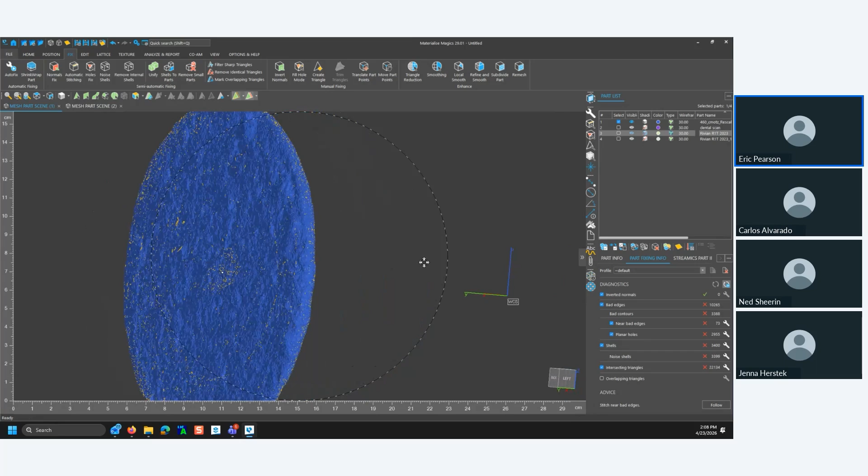But if I turn on my bad edges, we can see that there are a lot of spaces around this disc that are not quite touching, right? We've got a lot of holes in here, a lot of really small things that we need to remedy. And if I go over to my part fixing info tool page down here, you can see we've got over 3,000 bad edges or bad contours, 73 specific ones that are almost touching, but not quite, that don't align. And then we've got almost 3,000 holes on this, right?

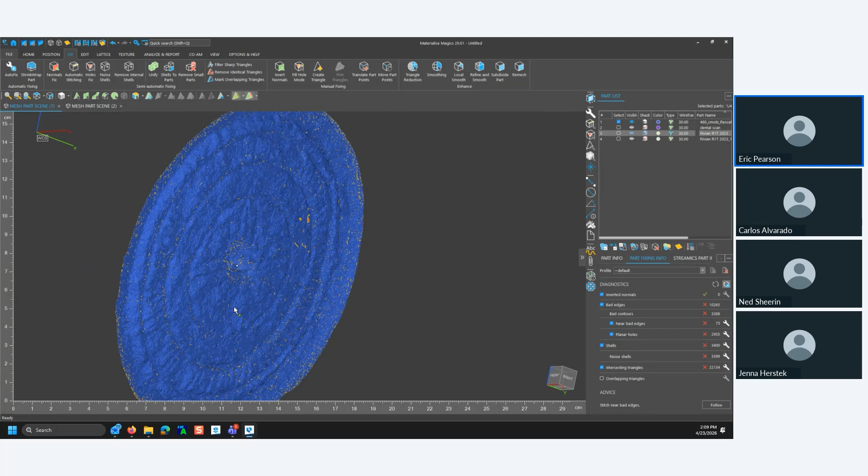This isn't something that I would expect anyone to go through and manually fix every last one of those holes on this STL. And then another issue with this part is that if you're going to be using this or printing this off, you probably want to try and capture the actual curves of the object, right? And this piece of scan data is really kind of chunky, kind of blocky looking when we look at this. So I'm going to zoom out. Let's take a top view here.

And first off, I'm going to just patch up some of these holes and near bad edges using the stitching tools. So that'll go through and kind of bring some of those edges back together so that they are properly touching. And then I'm going to patch up some of these holes. Depending on which technology we're using, near bad edges can cause toolpath issues. Same with holes, right? You don't want to have gaps in the part that you're working with.

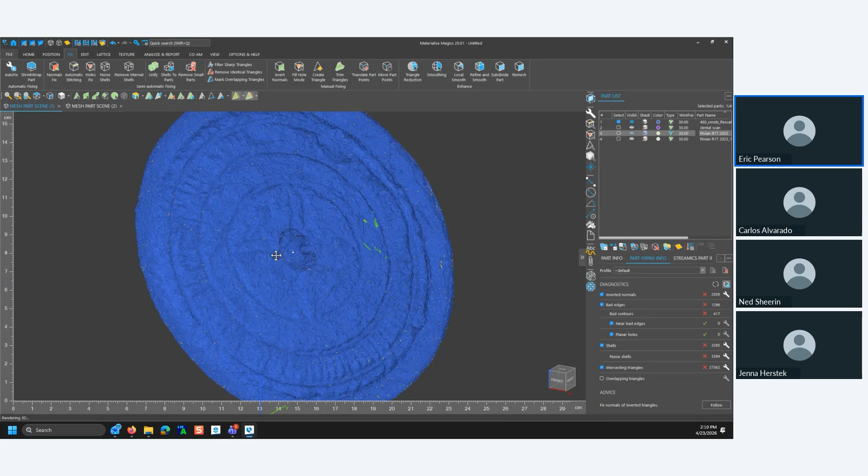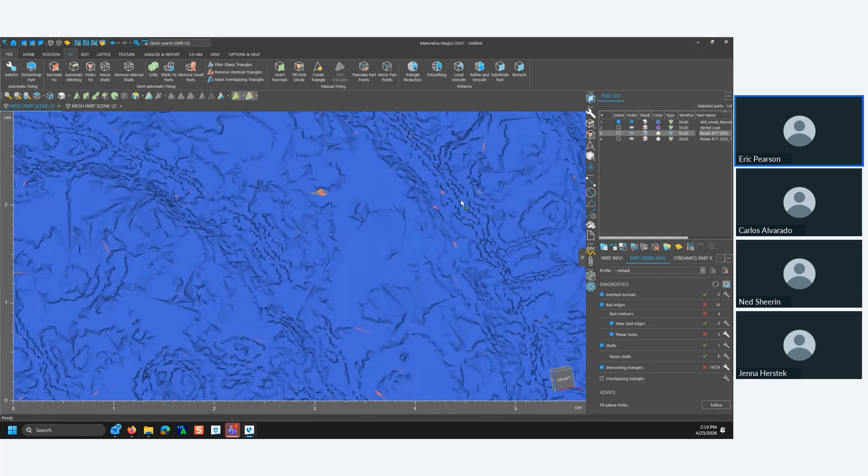Now we've got some issues that we continue to see with this part. But what I'm going to do here is use this noise shell fixing to clean up some of those pieces of floating geometry. So noise shells are like little bits of triangles from that scan data that have been floating in space, not connected to the full model, right? So now I have this. It's in pretty decent shape. I've got some geometry that's overlapping with itself.

But what I can do to try and help with that is use this smoothing operation. What the smoothing operation should do is average out the angle between all of these triangles that are used to make this STL up. And then that should get me back to a bit more of that organic geometry. It should help average out this kind of stair stepping we see on the edge of the disc, and it should help untangle some of these triangles from each other. So before I go through and fix any intersecting triangles, I'm going to try smoothing this out to see if that helps.

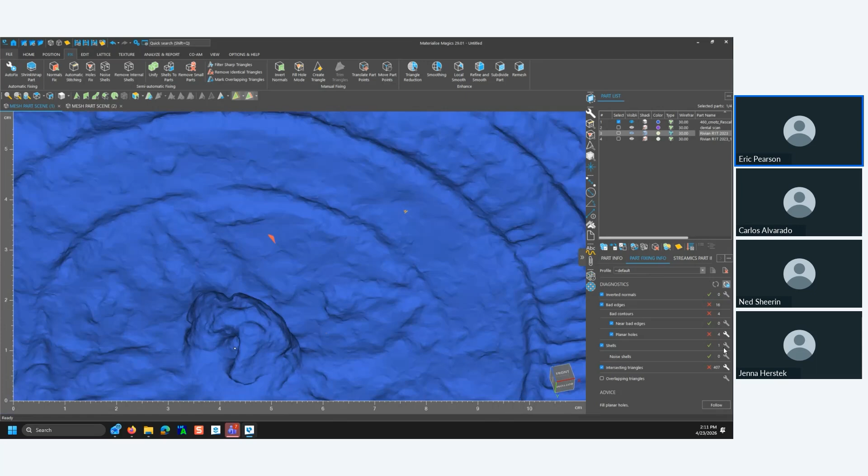All right. So now, I know I don't have a reference picture, but this does look a lot more like our disc that we have at the museum. And you may have noticed down here in the bottom, I went from several thousand intersecting triangles down to about 400, and maybe 4 more holes. So let's patch those holes up, deal with some of those shells, and then clean up my intersecting triangles.

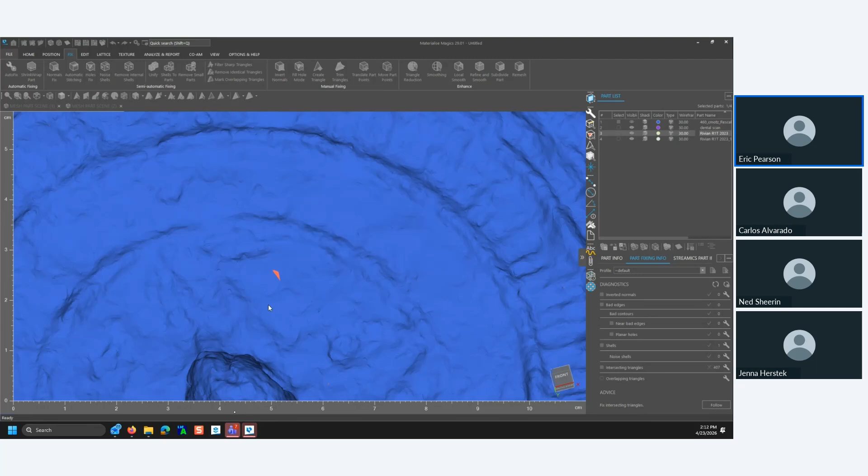And we have a solid part here. Normals are all good, so we shouldn't have any toolpath errors from the tool reversing on itself. Everything's connected. We have one solid shell here, so we shouldn't have anything that is loose and floating. And then I could move on, send this over to slice or set it up with supports, and send that slice stack over to the printer, right?

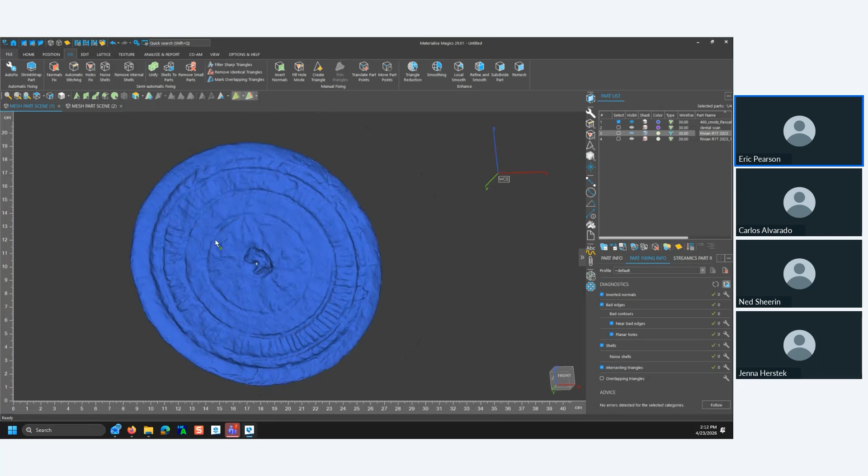Next one I want to talk about is another piece of scan data, right? This is a dental scan taken from a set of a lower jaw, right? Now, typically for a part like this, you'd want to have a base so that you could set it down on the table, right? But as you can see, there is no bottom or base. This part is just a singular surface.

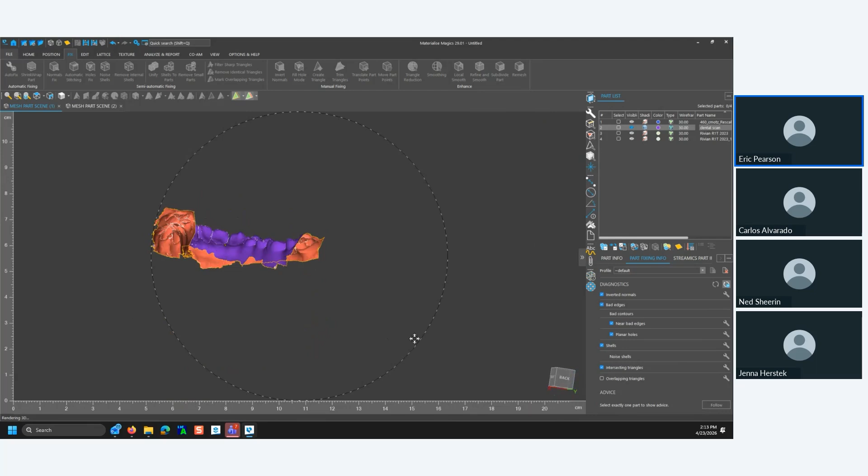So we have a function that we can use on this to make it solid, which is called surface to solid. And what I can do is I can just set it up as block based, give it a Z height of, let's say, 5 millimeters for now. I'm not going to hollow this out. So we're just going to drop it down 5 from the lowest point.

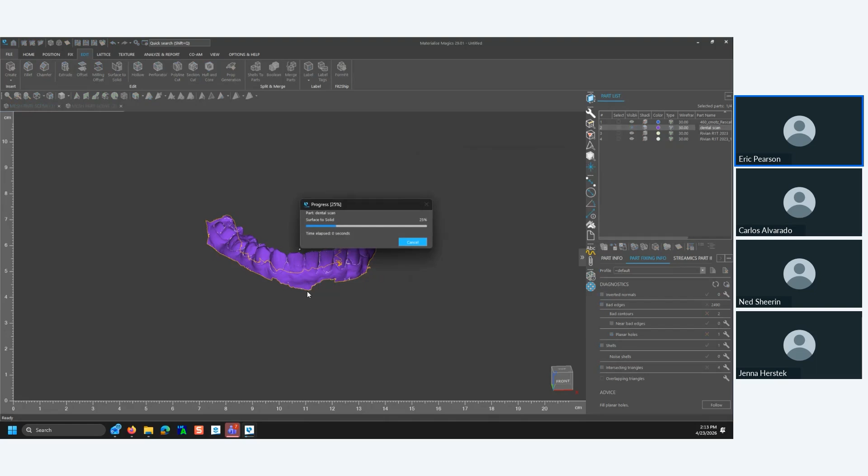But you'll notice that this is a little jagged, right? This isn't the neatest print that we could do, and we get a little bit of artifacting here as it tries to patch up the hole. So we can do better than this. So I'm going to just press Control-Z to undo, and then I can use a couple of the tools here in my editing suite as well as my fixing in order to get this to be cleaner.

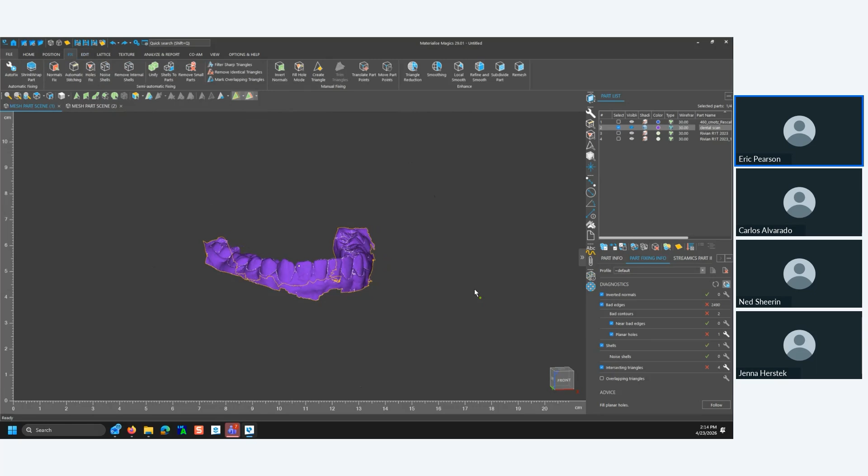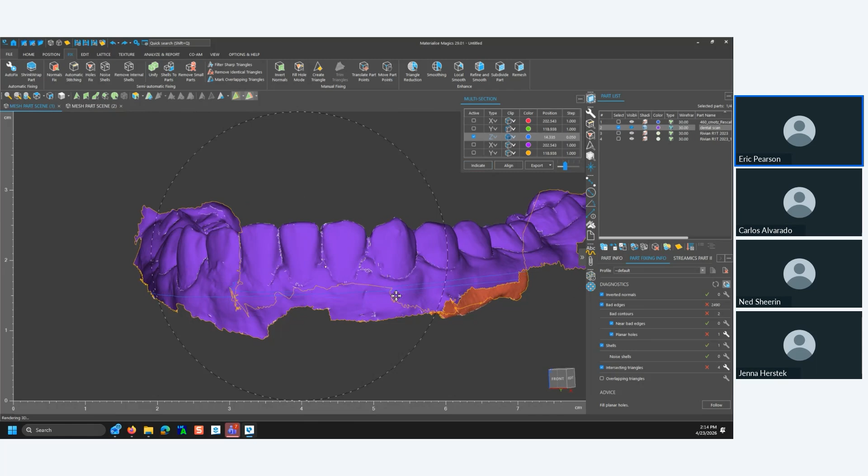First thing I'm going to do is I'm going to use my multi-section tool to set up a straight cut on this to get rid of a lot of this bad contour, right? So I'm going to lose a little bit of the gums here, but the important information on this part really isn't the gums, right? It's the teeth. So I'm going to set a cut probably a little bit below the tooth. I can use indicate to just click on my STL and set my line. I'm okay with it being right about there.

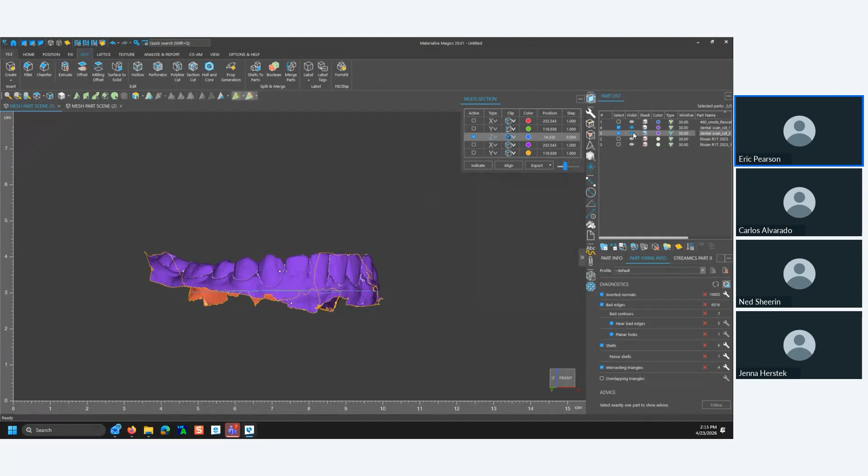And then if I go into edit, I can use my section cut tool. Just go through and cut this. It's going to give me a warning: hey, we got bad edges, this could cause issues. I'm okay with this. And now I have two parts. One is the area of the scan that I want to get rid of, and so I can just go through and unload that. And then I have the remainder of the scan that I can keep working with, right?

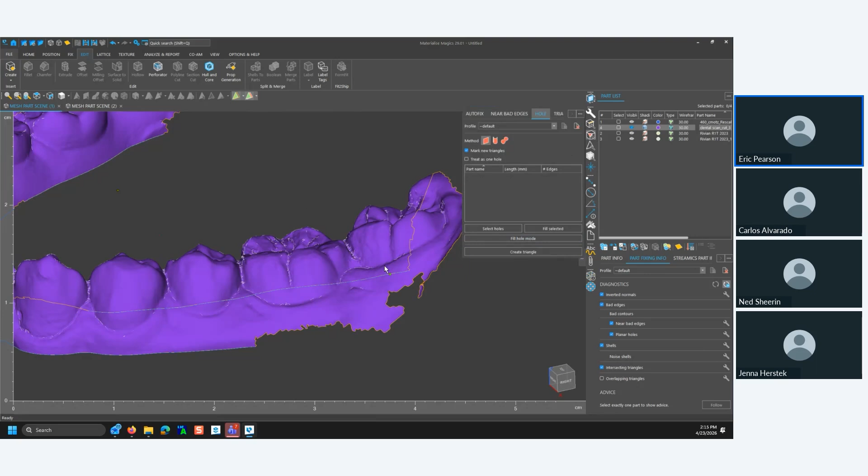So if I want to clean these edges up, I've got a couple of options, right? I can try to patch some of this up by using my hole fixing tools to create some triangles, like add boundaries here. So I can go here and then just add some information there. And then use my freeform hole filling tool to just fill that up. Smooth that over. I can do the same thing over here.

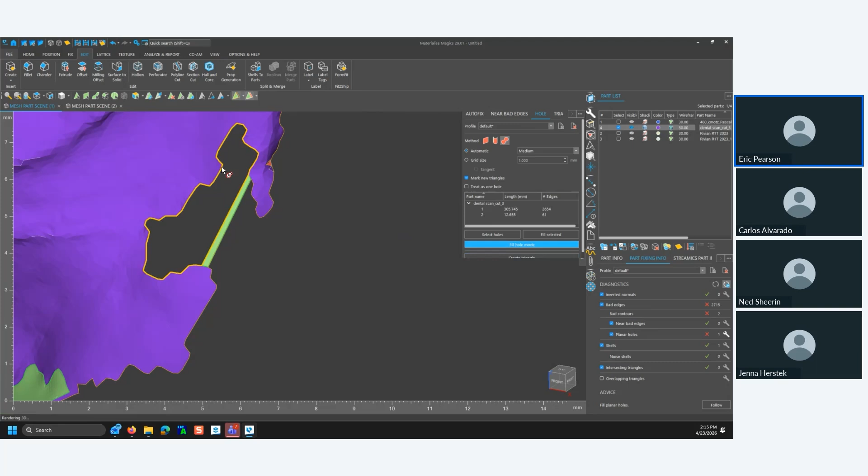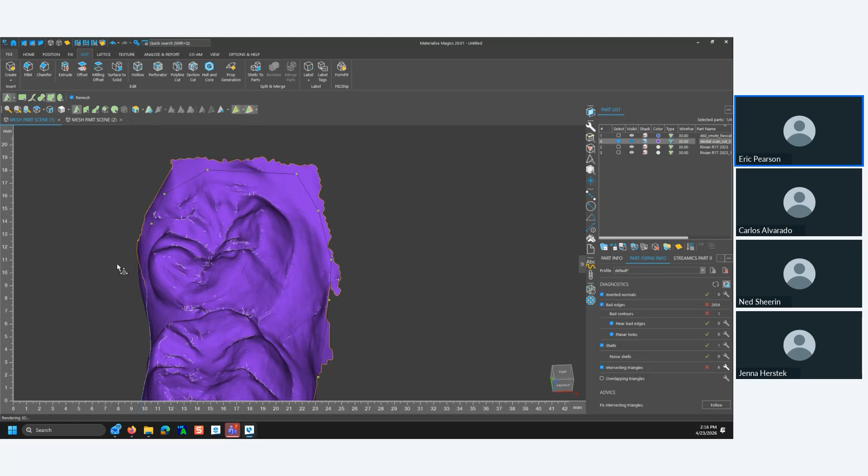And then for some of this area over here, right towards the back, I might want to just trim it. So what I can do is I can use my triangle marking tools in this ribbon, give it a polygon selection, tell it to remesh so that I'm able to cut exactly the triangles I want off. And then take a view from the top and just line this up so that I'm able to trim my STL. I got to close the polygon here. And that's going to mark all those triangles, and I can just delete those. And that cleans up my edge.

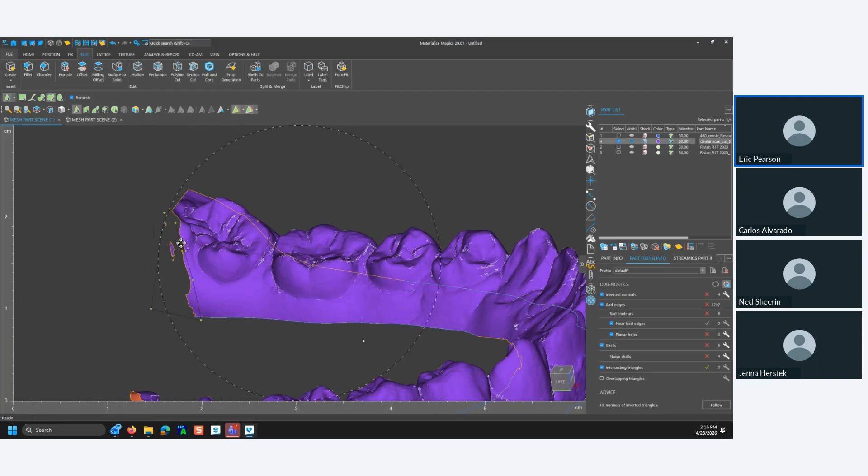I'm going to need to go back and take care of these polygons there, right? But I can continue this process of just cleaning this up, getting rid of information that we don't necessarily need in the final print. Delete that, and go through and clean this up, right? So I'm just going to go through and finish that process up here, where I just continue to remesh this part, clean that up.

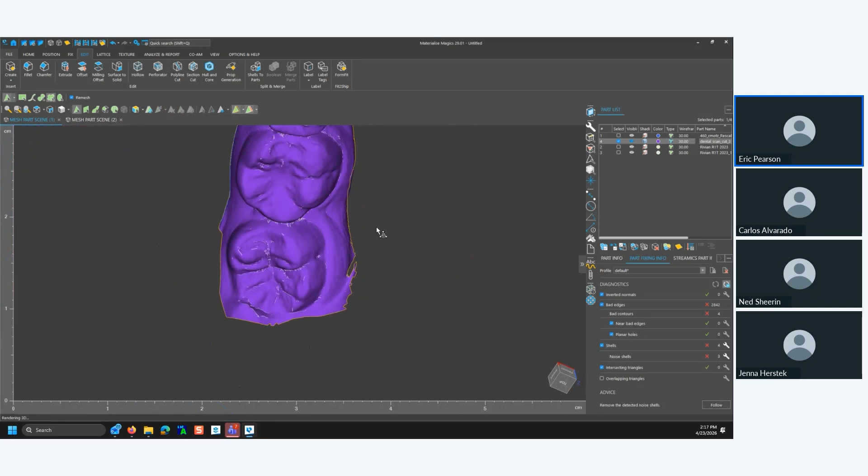If I were to try and print this part without giving it a base, if the slicer were even to parse it at all, say if I was making this in a stereolithography process, I would end up with possibly just a film, right? Best case scenario, I'd end up with a film floating in my resin bath. And that would be a mess to clean up. That wouldn't be a usable part.

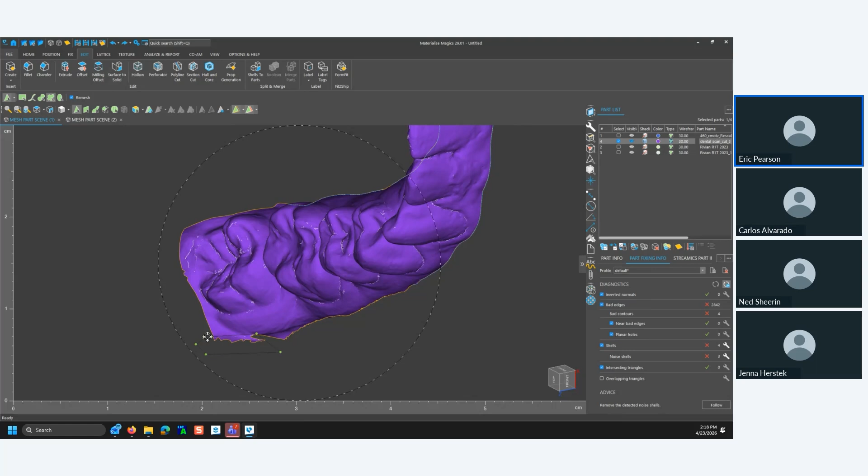It's probably similar with DLP, right? Or for metal, I would just end up with a very thin surface of metal here. Well, most likely the slicer would not be able to parse this part, or it would say, hey, there's not enough information to slice this.

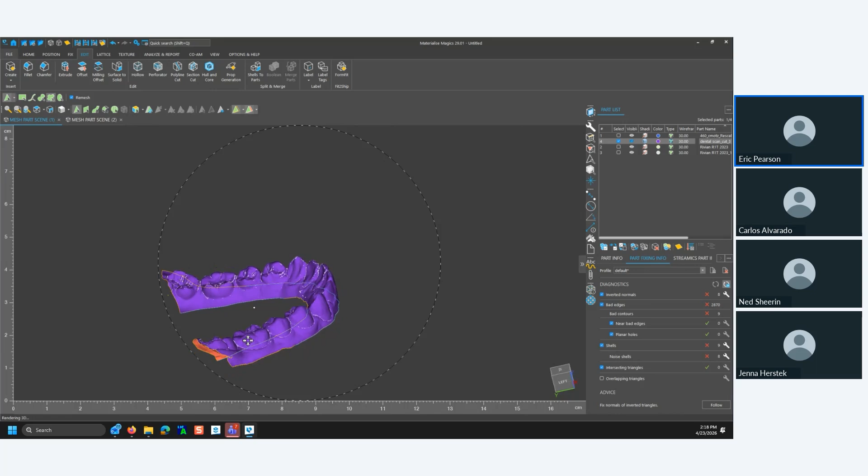So we've got this one surface that's still a little jagged, but I can go through and clean up my noise shells. That should get rid of my floating little islands of geometry. And then, in the interest of time, I'll just hop over into surface to solid, go over to block based, set a height, let's give it 7.

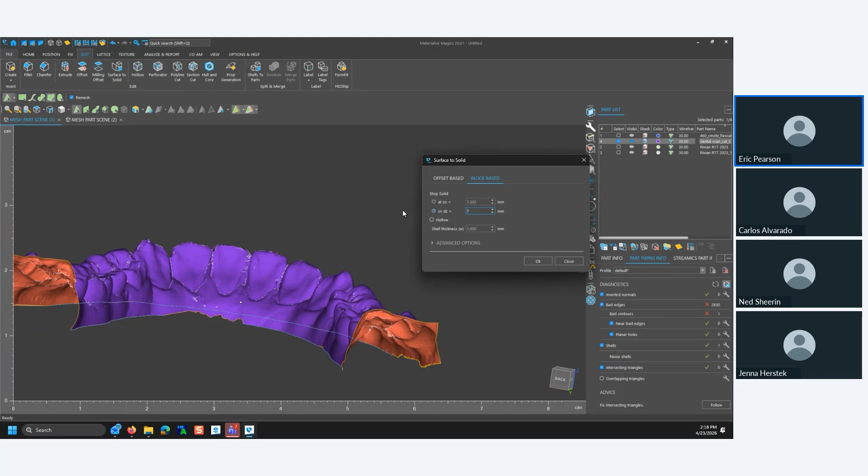And that will go through and create the base for us so that we can send this over to the printer. I'm not too worried about these intersecting triangles, but I can clean them up. Intersecting triangles can cause situations where you have overcure on a part that is printed in a stereolithography process.

So you might have discoloration, or in a situation like laser powder bed, you might end up with different mechanical properties there. In laser powder bed for plastic, you would probably end up with some discoloration in that region as well. Or something might even break because too much energy has been put into it.

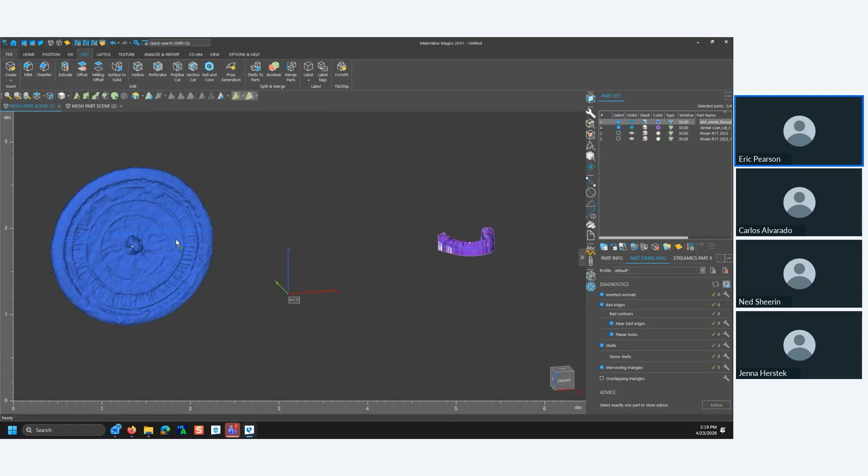Okay, so those are kind of the first 2 files. I was able to fix those pretty quickly. And the last one is this model that I have of a truck. So this is what it looks like when I import it. There's a lot wrong with this model here.

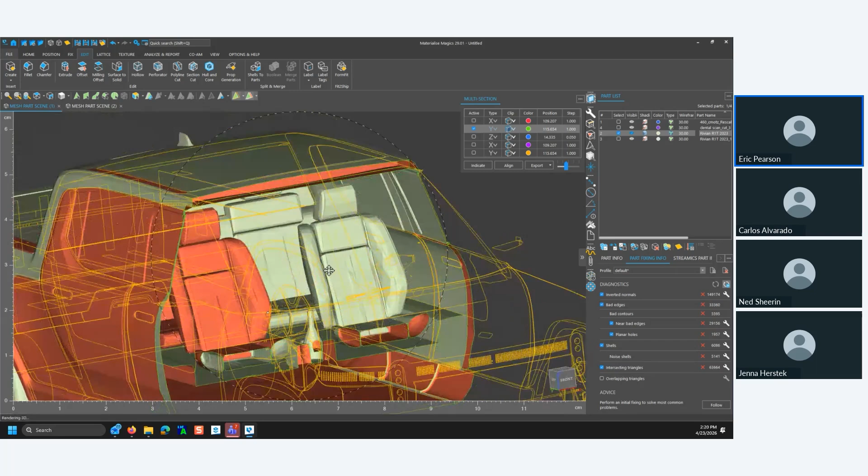Generally, the first step to any fixing I recommend is to visually inspect the model and get an idea of what's going on. So I can use some tools over here with my sectioning to take a quick cross section. I've got all of my seats on the inside, my steering column, the dashboard. I have a whole bunch of little holes for individual LEDs going on here.

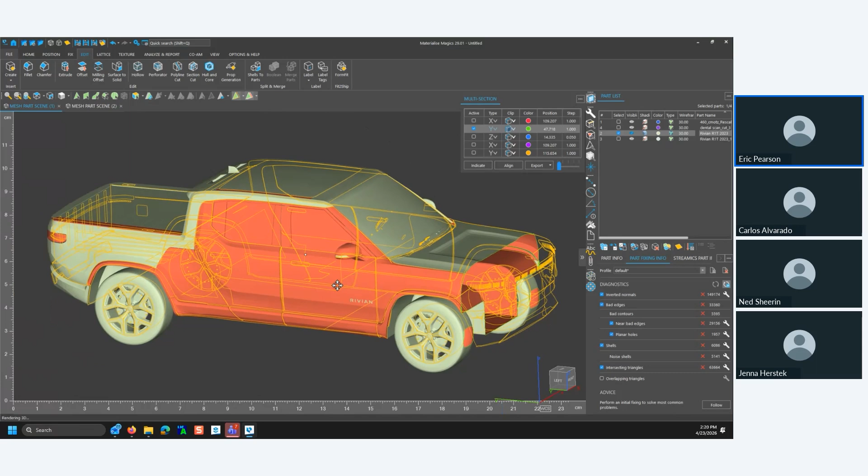I don't need all this information. When I print this, I just need the outer shell for this part. There's a lot of steps that I needed to go through to fix this. Generally, the place I would start is fixing these inverted normals. The inverted normals are marked by these surfaces that are in orange.

What this can cause in the slicing process is a confusion in your toolpath. For SLA processes, it might error out the slicer. For DLP processes where you need to have solid blocks of information, it might cause areas that are supposed to be closed to be open, and then you'll just be missing large pieces of geometry or have a hole in your part and then fail the print.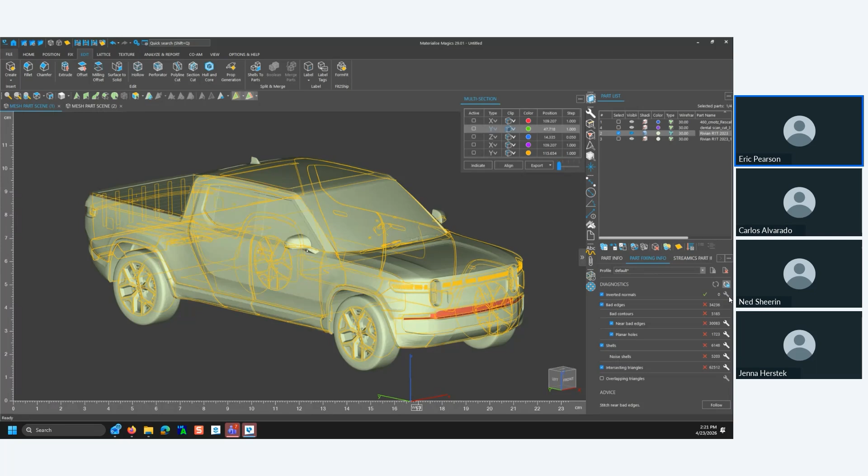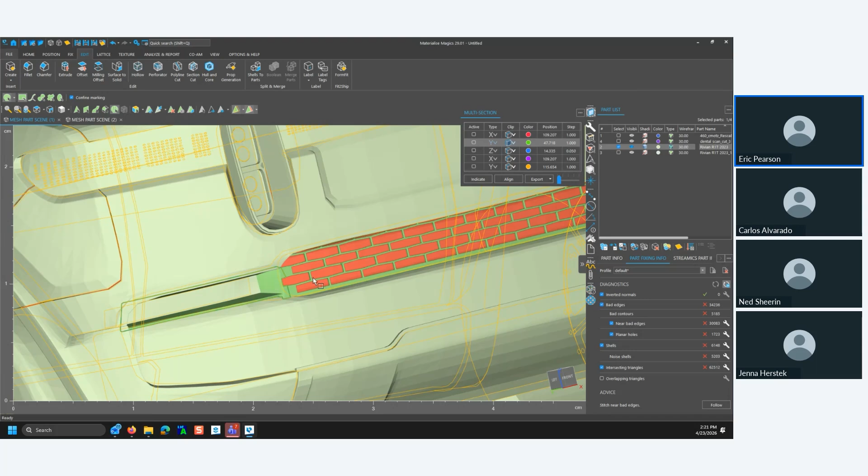So one of the things I would want to do here is fix these inverted normals first. That gets through most of my outer part here. You'll notice that the grill has been inverted back to be inside out. I can fix that myself. Oh, sorry, I need to use this tool. Just by marking this shell, grabbing that grill, and then manually telling it, hey, flip that back.

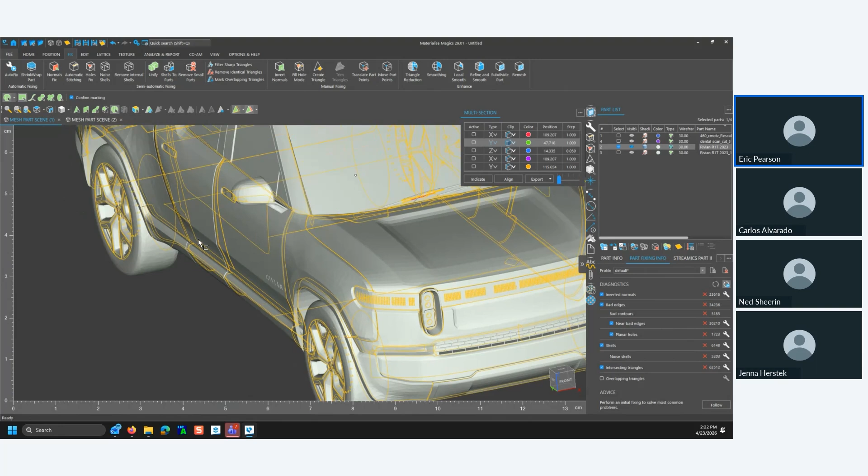I realize I'm using kind of a greenish color here. Let's make this a little bit more gray so that the marked triangles show up a bit better. So that's step 1. Step 2 would probably be going through and trying to close up a lot of these bad edges. If the triangles don't meet, then we might not have cohesive scan paths or tool paths for our slice files, which could cause failure at the print or at the slicer itself.

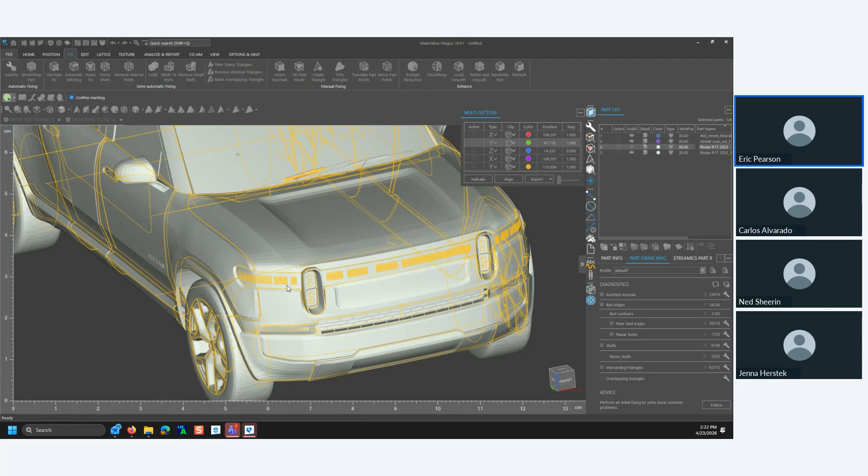So the next thing I would recommend: I know that all these inverted normals here are from the grill that I inverted myself, so I'm not worried about this number in the diagnostics page. But what I would want to do here is stitch this together and try to clean up a lot of those bad edges. You see that took care of a lot of the issues that I was seeing through these yellow lines.

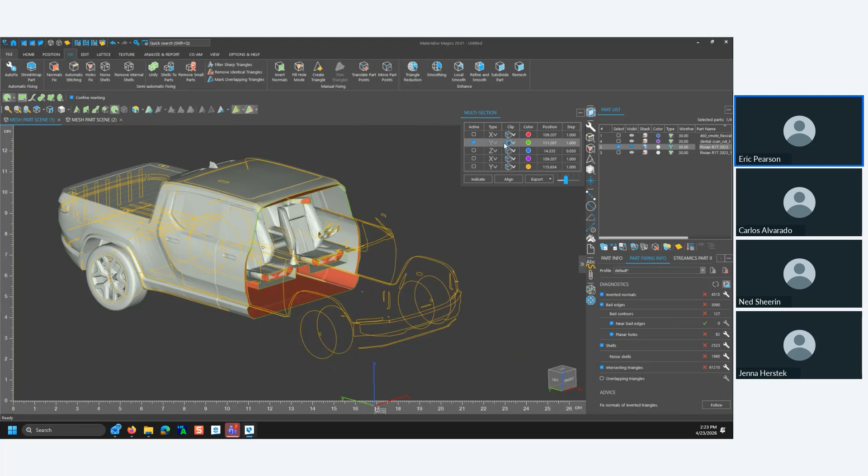From here, what I would probably want to do is go through and simplify the geometry. I don't need all the internals to this part. That's going to add material. That's going to add build time. These are things that we don't need to keep, unless we're planning on printing this in some kind of transparent material.

I can kind of declutter my view by turning on this hidden line function. And that will hide a lot of those yellow lines that we're seeing that are defining the rest of the vehicle.

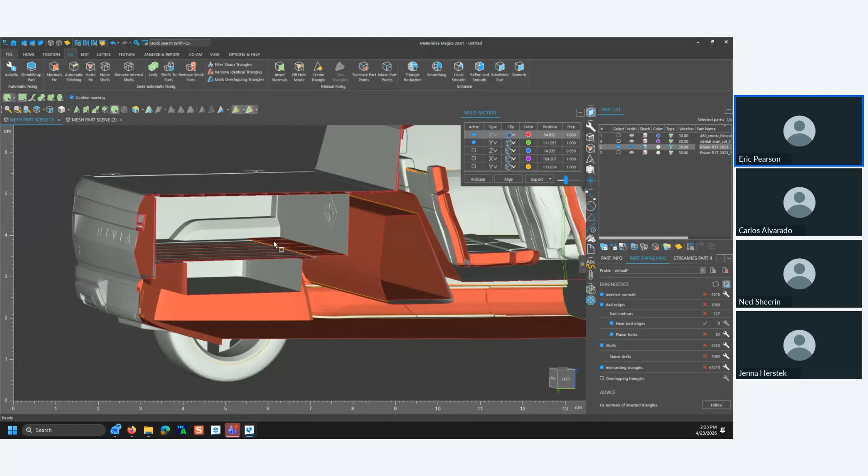While I'm trying to hide it, right? I don't need this interior to the trunk. I don't need all of these lights back here, right? Somebody went through and actually designed this very in detail, right? Or had a lot of detail on this when they were designing it, creating the STL file, but I don't need all of that to print it.

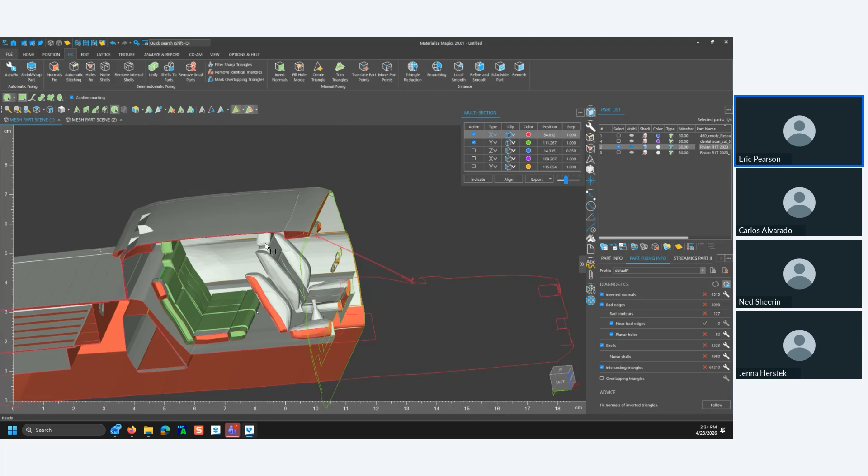So what I can also go through and do here is I can start manually selecting which shells I don't need, right? So this can be a little bit of a manual process sometimes, but it might be necessary in order to clean up the part. So I would go through, delete all these seats in here, get rid of the steering column.

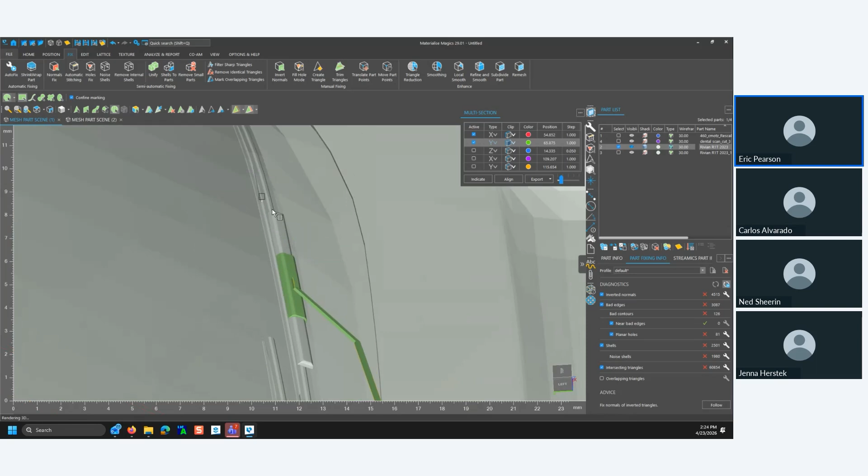Another thing to think about while you are going through this process is what detail can I capture and do I need it, right? So if you look out here, we have the windshield wipers. I might not need to have this detail. It might actually make it more difficult for me to work with this, right? So I can go through and get rid of the windshield wipers as part of this process.

Some other things to notice through the visual inspection here is that I don't have an axle connecting these wheels. So what I might need to do later is add a cylinder to make sure that these are connected to the part, or find some way to join these to the rest of the part. I might drill a hole in the finished product, right, and then run a rod through it.

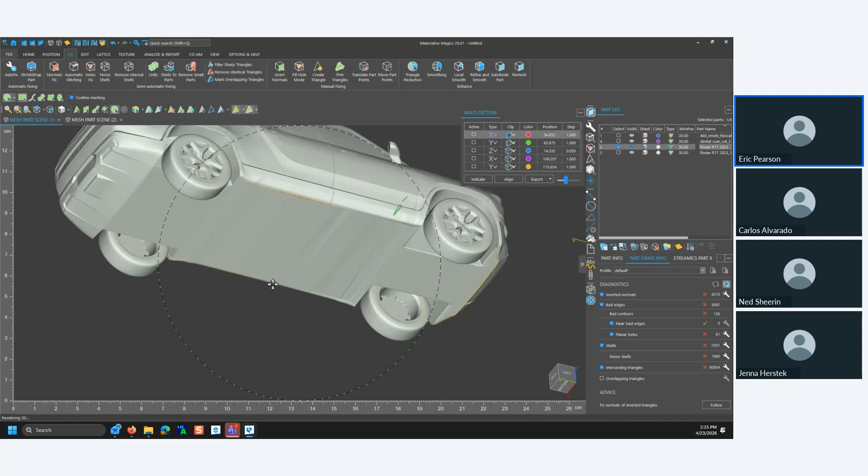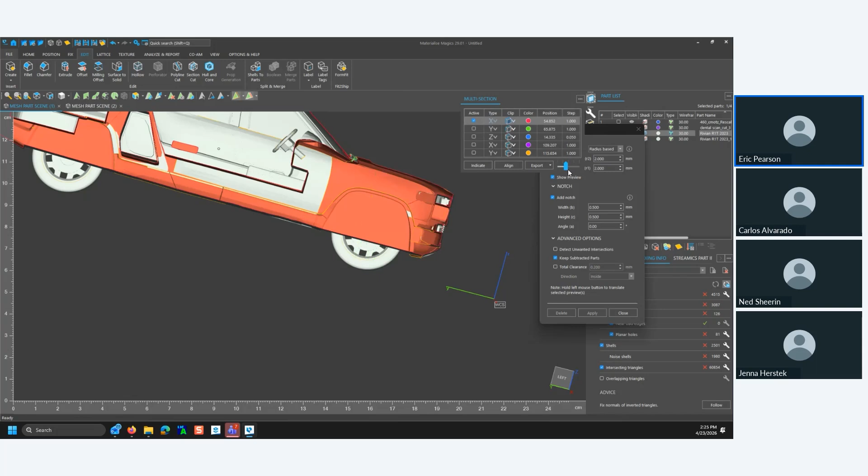If I wanted to do that, what I could do is just grab the editing tool, and we'll see if this works for me well, I can use the perforator, right? And I can set the radius of my rod. Let's say I've got a 2 millimeter diameter rod that I'm going to use, and then I can just X section. There we go. Hide the first wheel. Just line this up. There we go. Okay, looks like I need to fix this first.

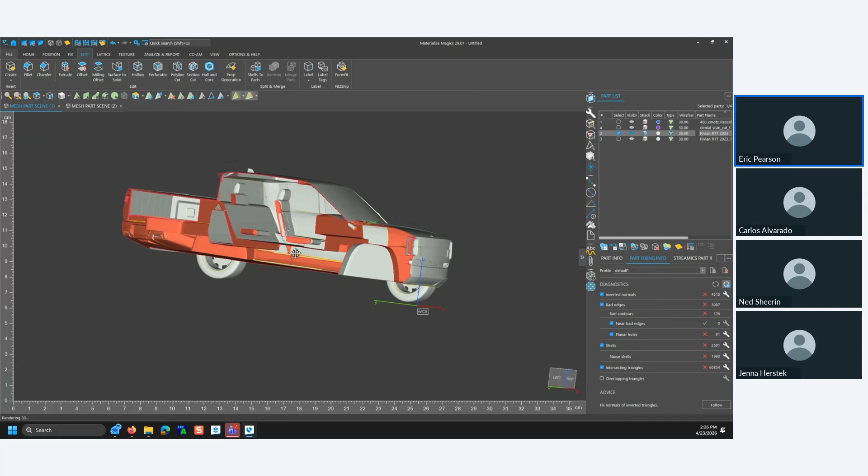That's fine. So there is a longer process where I go through and clean out, right, this entire truck. Once you kind of get the feel for it, it does become a little repetitive. So I have, through the magic of television, a version of this part that I've gone through and cleaned up a lot of things. You notice that we still have a lot of internal geometry here.

But what I'm going to do next is show you what is called the shrink wrapping tool, and it's going to look at this part and create a cohesive outer surface for me. And then it's going to take care of all of that internal geometry and toss it out because I don't need it. So I'm going to go over to shrink wrap.

I have two options here, global and local. Like if I wanted to just wrap the wheels, I could mark the wheels up and it would take a look at just the wheels. But right now I'm going to use global. And so I'm setting a sample interval, a gap fill, and a little bit of extra thickness here to add a little bit more robustness to the part.

So sample interval is how Magics is going to take a look at the part, kind of chop it up and read the geometry, right? A smaller sample interval is going to take a little bit longer to run, but it's going to allow you to save more detail in your part.

Gap fill is going to tell Magics what size of a gap in your geometry or gap between surfaces it should go over, and just paste kind of wallpaper over. I set it kind of small here just to try and cover some of the gaps that we have between the doors and the body panels. Adding extra thickness also helps with that process of giving it a little bit more robustness, especially in thin areas like we might have with the grill, right?

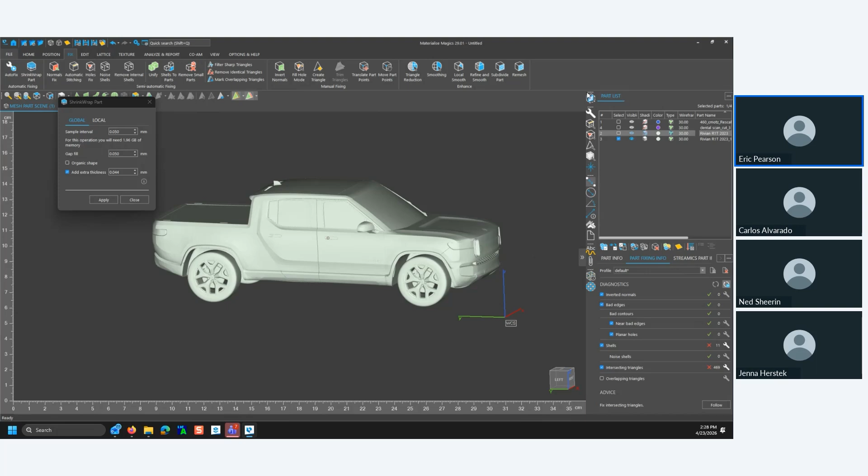And if I cut away here, this actually performed differently than it did the last time I ran this operation. Interesting. But we do have a much cleaner part here, right? You can probably go through and try and unify this body. And what this should do is also help clean up some of the insides here.

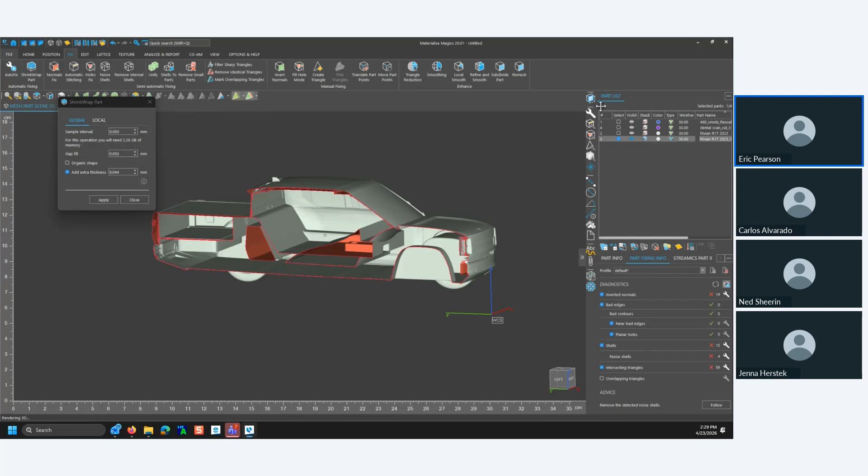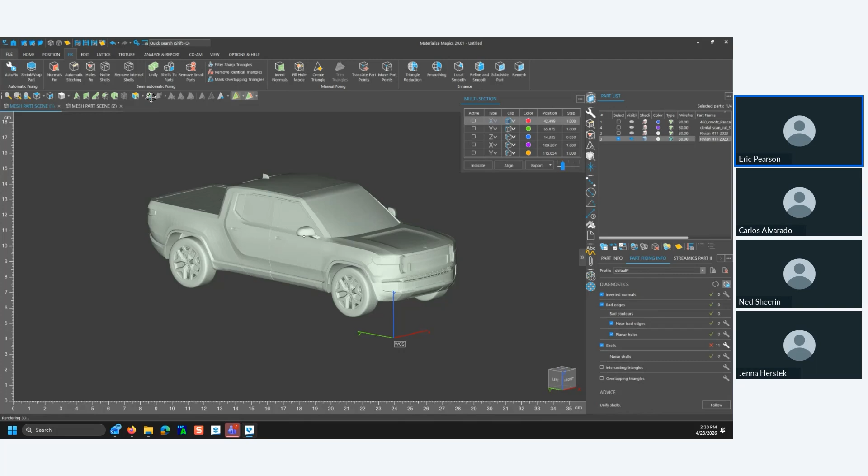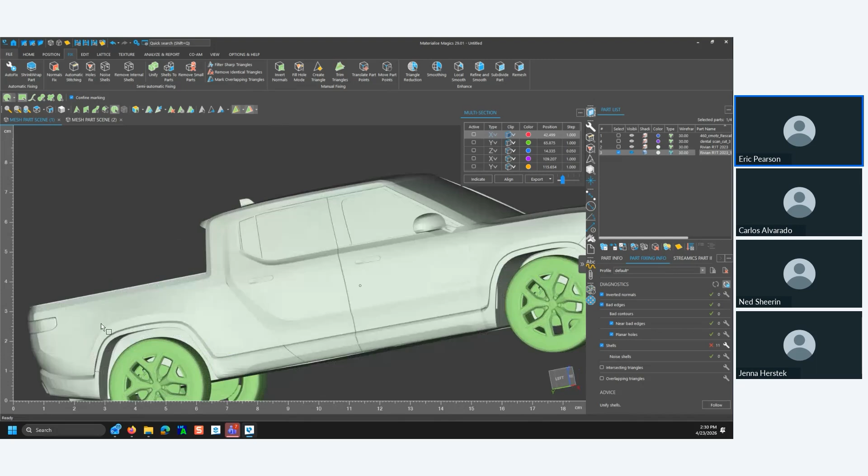All right. So clean up my noise shells. And then part of what I'll also need to do here is go through and identify which shells are which, and then how to attach everything. Most of these are going to be things like each wheel is its own shell, right? Need to make sure I have a way to run something through each of those and connect it to the car. So I could run a cylinder through here and run a Boolean operation to connect those to the rest of the body. And then I believe the rest of my shells are smaller objects that are still in here that I might need to clean up manually.

But given what I've shown here, I'm running low on time. You can kind of imagine what that process looks like, right? So I think this is when I should be handing it over for questions.

Thanks, Eric. Sorry, it took me a second to find myself here. That was amazing. I hadn't seen the shrink wrap feature, which I thought was really cool. So thanks for sharing that. We do have a few questions that came in while we were talking.

In fact, the one question we got two different times was, how much does Magics cost? If you don't mind, I'll take that one, because Allegheny is the authorized education solutions partner for Materialise in our area. And the good news is Materialise Magics is not sold the way it used to be. It used to be a very expensive package. It's now sold as an annual license. And the price really depends on whether you need a single seat or a multi-seat license, whether the seat is static or has to float in your campus or lab. Do you need any additional advanced modules?